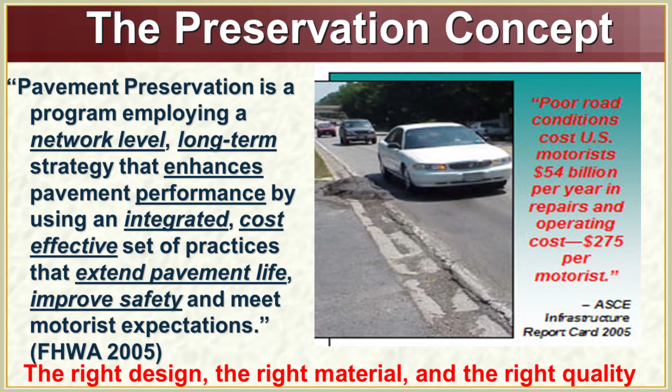Anyway, I've been asked to talk a little bit about extending pavement life, extending the life of pavement preservation techniques. The slide here is just your classic definition of pavement preservation. All the topics you see, the definition, we're going to touch on all of those briefly in the talk. Pretty straightforward—we want to extend the life of the pavement, the life of the technique.

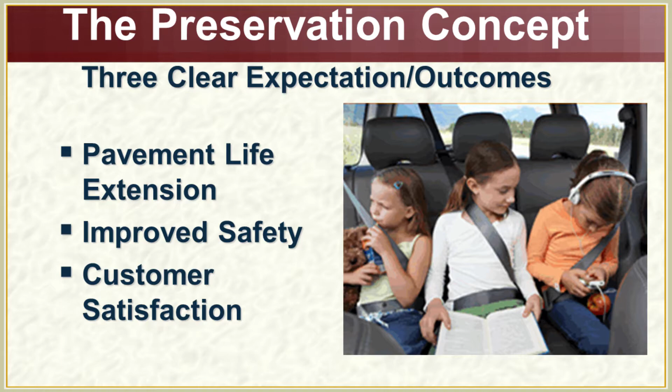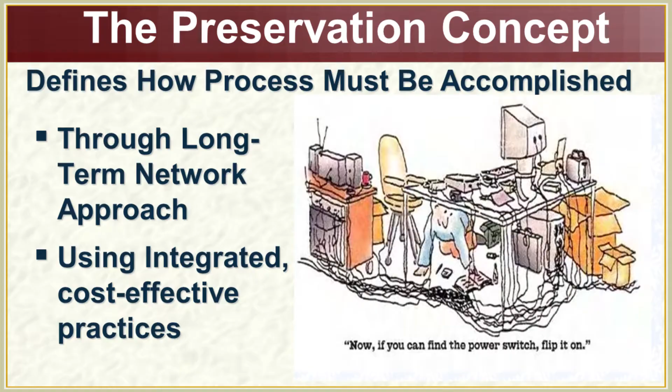Safety is always paramount, and we want to make sure the customers are happy. How the process is accomplished, both through the long-term network approach, using integrated cost-effective practices. The bottom line here is we need data-driven decisions. Pavement life extension—here's a nice picture of a next-gen concrete pavement surface.

So the question that Larry had is, are we extending the treatment life or are we extending the pavement life? And how does one tie in with the other? Are the treatments cost effective?

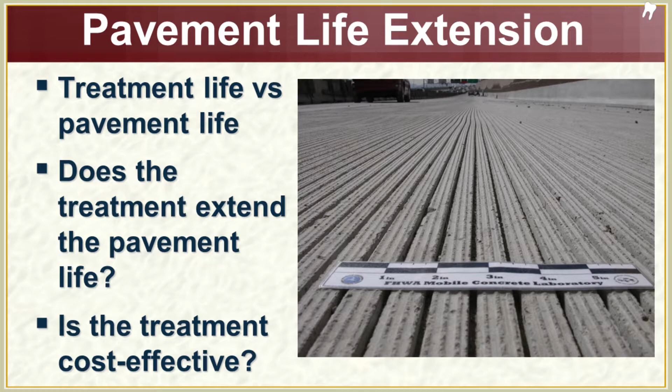Now, I had the notes from Larry's presentation, and I'm not sure if he's got family in the dental business, because about 8 or 9 slides he talked about dental work. So if you see that little tooth in the lower part of the upper right-hand side there, I'm supposed to mention that doing CPR repair is like dental work. We want to make sure we hit it at the right time. We don't want to have a cavity and wait. We're not going to take care of the cavity—we're going to wait for the tooth to get completely pulled down, and then we'll go ahead and get an implant or something along those lines.

If we've got a thing that's wrong, we hit it at the time and not wait 10 years until everything else needs to get addressed. You maintain a concrete pavement in good repair, it should stay good for the entire life of the pavement. One of the things we sometimes deal with is a little bit of roughness early on in the pavement.

The question is, should we be grinding our pavement at year 10, year 15? I think some of the techniques our paving contractors have done in more recent years with real-time smoothness, we are starting to see some very good IRI numbers in the 40s and 50s without any diamond grinding taking place. A lot of our pavements, higher volume roads, take a beating. The low volume roads, when we use concrete pavement, those pavements seem to last a very long time.

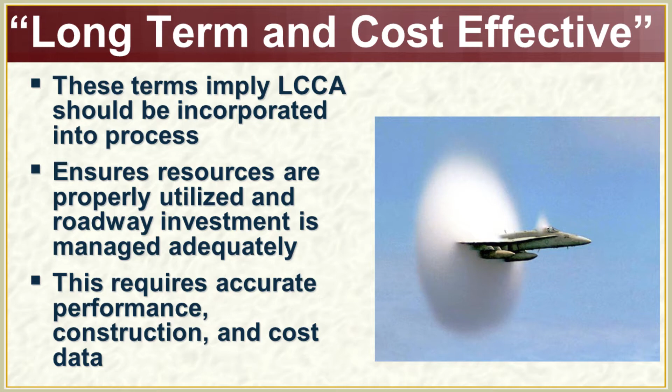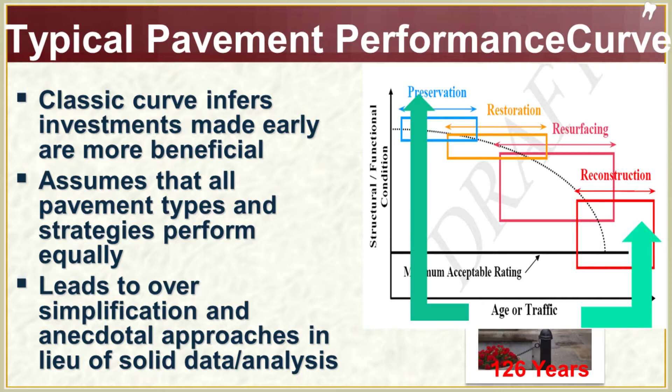We're going here for more data, feeding the pavement preservation, the rehab data, all of that into the LCCA process. It's an interesting curve we've seen, the classic pavement deterioration, pavement preservation curve, where you're starting out in the early life of the pavement with preservation, then you go to restoration. But when you take a look at a pavement such as the one pictured, in Bellefontaine, Ohio, built 126 years ago, there was some rehabilitation work, but that pavement really doesn't match up real well with that curve.

We're going into here—Alicia on Tuesday talked about the circle, having everything kind of going, feeding back into taking your data, putting pavement down, collecting the data, fixing it, and going through that entire process and repeating it. And that's what we've got here: our circle of life.

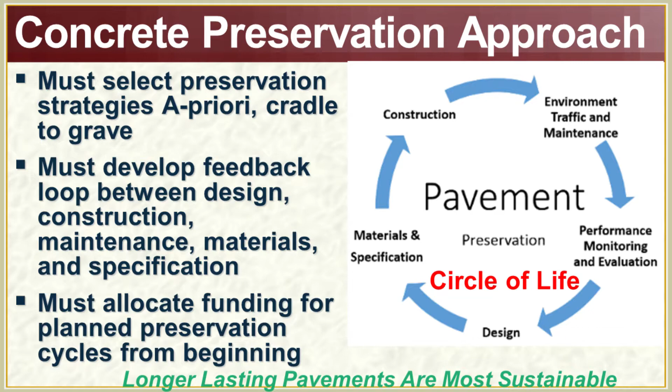You know, we think of concrete pavement as being typically used for heavy loads. We see them on the interstate. When we do use the concrete pavement on a low volume road, we get some pretty darn good life out of it. Not to say that it doesn't work pretty well with the high volume type roads as well.

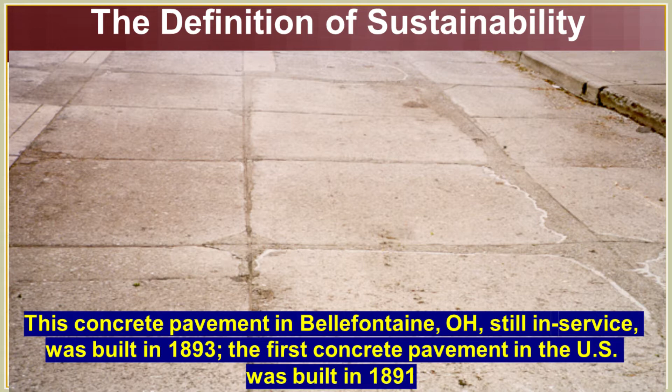A nice little picture on the definition of sustainability. Here we got a pavement. This is the one that I mentioned, Bellefontaine, Ohio. First concrete pavement in the U.S., built in 1891. It's still in service, 126 years after it was built. Another shot of just reinforcing the idea of the dental work, fixing the pavement when it needs to be fixed.

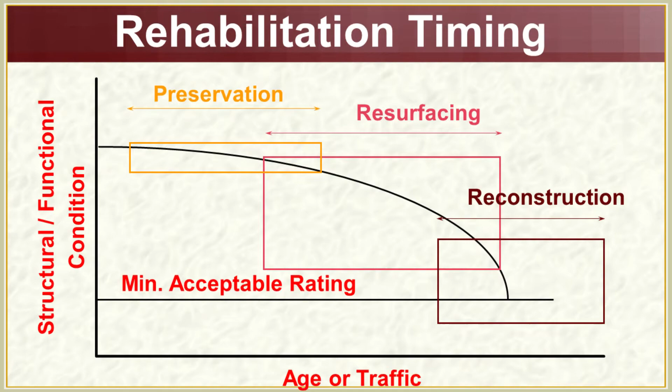This is the classic deterioration curve. This is really pretty much developed more for the asphalt pavement side, and 95–96% of our pavements are asphalt pavements. So in that aspect, maybe this curve works real well. But when we want to compare that with what we see with the concrete pavement, it's maybe a little bit different.

It gets back to the dental work. So when we see the deterioration take place, we don't want to wait until year 10. We may need to do some dental work a little bit beforehand to do the rehab work. And that's where we're getting into that additional life that we're buying by doing that repair.

A little bit of just comment on pavement rehabilitation. Years back, I think the comments were made that we've got a zero maintenance pavement, and I think that caused a lot of problems. I think people had the perception, and it's not only a perception, that we put a concrete pavement down and we didn't touch it. And in reality, in a lot of cases, we really didn't.

It's only been, I think, in the past 10, 15 years that we've really seen states jumping on, and I know particularly here in Pennsylvania, it was only about 12 years ago that we really got serious with the whole host of different types of CPR techniques.

One of the things that's good to know is a lot of states have also had some very tight funding, and we attack things from the worst first type scenario. And I know the work that the department's been doing, Mike Long's group is taking a look at, let's not necessarily attack the worst first, but let's attack the ones where we can get the most cost-effective improvement to our network.

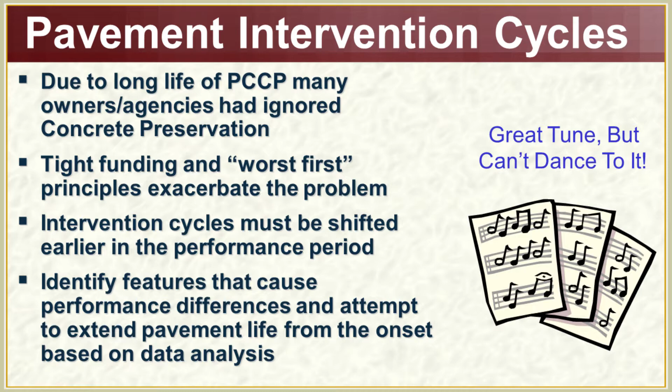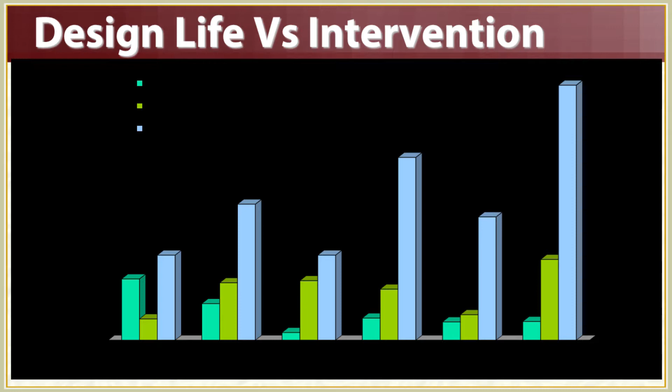Interesting slide over here compares the number of ESALs a pavement was designed for. That's the teal. Green is the amount of traffic that pavement carried before intervention, the diamond grinding, took place, and the blue is how many ESAL loads have taken place. And with all except for one case, the diamond grinding, the rehab work, did not take place until after the designed ESALs were carried on that pavement.

Just touch a little bit on safety. Yesterday was Work Zone Safety Awareness Day. Interesting, sad statistic, and this is from NHTSA. On average, 14 motorists and 2 highway workers are killed in work zones in the United States every week. Now, we've done a lot of work to try to raise the awareness of the dangerous work zone, and we particularly have been focusing on our employees, our fellow workers, inspectors.

But when you look at the statistic, if you're a motorist, you're 7 times more likely to get killed in a work zone than a worker. And in either case, those numbers are both really unacceptable. We've done, I think, a great job at raising the awareness of work zone safety from our perspective, but I think we need to carry the message to our friends, family, and neighbors as well, because there are a lot of things out in work zones that folks are just not aware of.

One of the good things, and I'm happy to say, is that in Pennsylvania we joined Maryland, our neighbor to the south, just this past year. The legislature did approve allowing the department and the turnpike to put cameras in work zones. The hope being not to generate additional revenue, but to slow the traffic down so that everyone gets home that night.

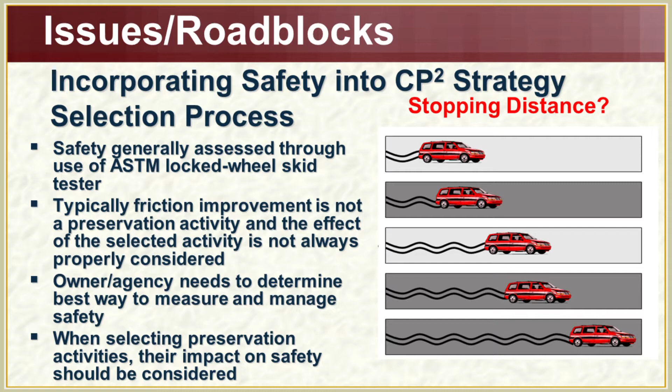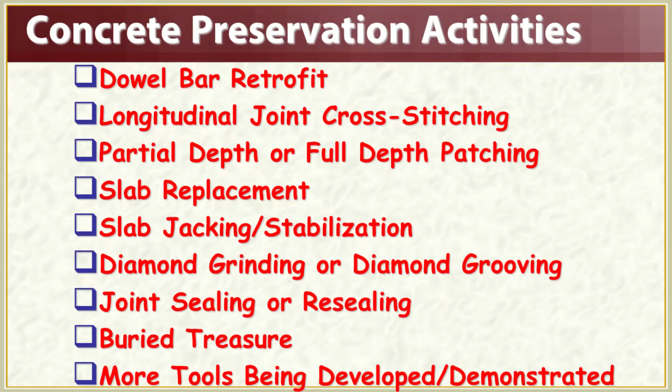Touching just real quick, I don't want to belabor this slide. We certainly do need to take into account safety improvements. I don't know if it necessarily always gets done in all the CPR type projects, but it is something that I think each owner agency needs to take into account when doing pavement preservation work. I want to touch just on a few of the CPR activities. These are pretty much listed in order.

I think it's pretty much in line with a lot of state highway agencies' practices in terms of if you're going to do concrete pavement restoration, what's the order you need to do them? And there's a whole host of techniques that you've got there. I've got a slide on each of these techniques.

Also want to just mention that there's also some tools that are in the development process. PennDOT has done a yeoman's effort to put some additional tools into the Pub 408, into the RC standards, tools that have been used in other northern tier states. I've always looked at CPR as being something where the less intrusive you are, the better for the patient.

20, 30 years ago when something ailed a patient, the surgeon was out there ready to cut things out. And there's a whole host of less intrusive MRIs and other technologies that allow the medical profession to pinpoint what needs to get fixed. Well, it's the same. Let's treat the concrete pavement as a patient as well. And we focus on just addressing the things that need to be fixed and be as least intrusive as possible.

Dowel bar retrofit is taking a concrete joint that hadn't been doweled, or a crack, and putting dowels into the joint. Cross-stitching is for longitudinal cracks. We do not use cross-stitching for transverse cracks, not if we want that technique to work. The dowel bar retrofit is the device we want to use for the transverse cracks because our pavements expand and contract with temperature changes. The longitudinal joints are more like hinge joints. We don't want them opening up.

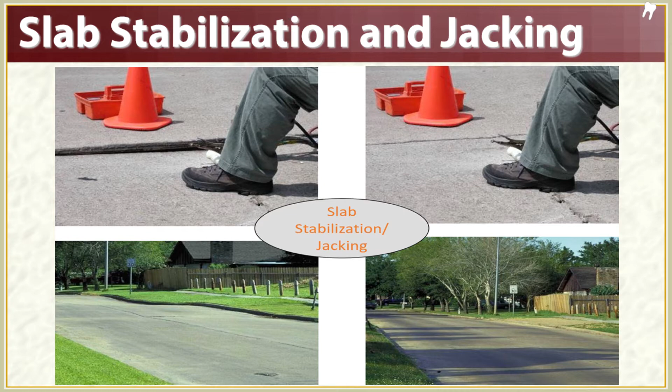And the tie bars, we alternate about every 3 foot, drilling holes at a 40-degree angle, drive number 4 bars in there, epoxy them in, and that holds cracks nice and tight. I don't know what the IRI on that roadway on the bottom left was, but I can guarantee you it was a whole heck of a lot better after they got done doing the slab stabilization and jacking.

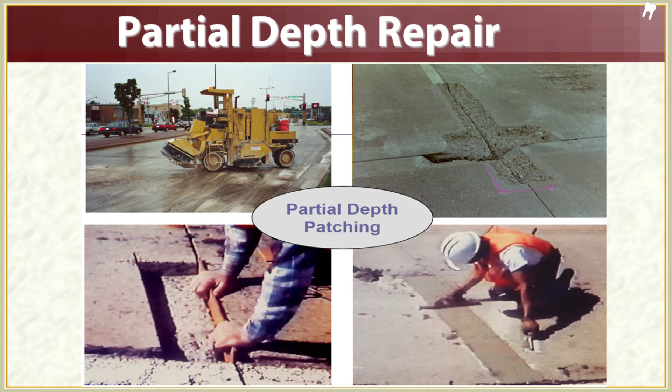Partial depth repair. It's a technique that in some states, some districts, has worked very well. In other districts and other agencies it has not. I think the day before the comment was made on average performance, and the average performance of a spall repair is about 8 to 10 years. Well, it's 8 to 10 years, but if you're the state that's getting 2 or 3 years performance, that average really doesn't mean anything for you.

And if you are a state that's getting 2 or 3 years of performance on the partial depth repair, that means we need to step back and ask what it is we are doing differently from what the others are doing, to make sure that when we do this type of technique, we get the 8 to 10 year performance out of this repair.

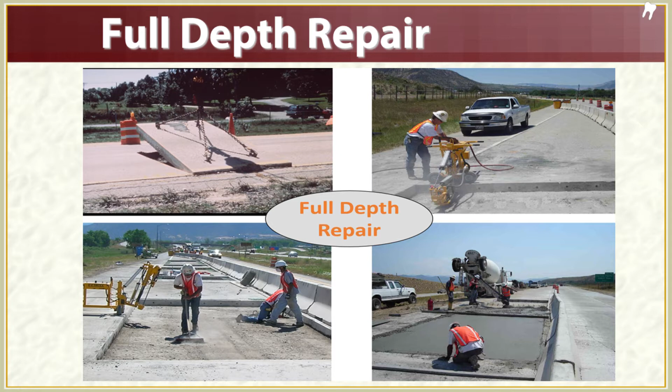Full depth repair, we sometimes do need to take a slab out, or a series of slabs out, and this is a bit more intrusive than the partial depth repair. We're taking the entire slab out. Depending on what kind of base we've got, we sometimes have to do a lot of base repair underneath. Sometimes the quality of the base is the reason we had the cracking and distress in the pavement to begin with. We take out the deteriorated concrete. Sometimes, like I said, the base comes out with it.

We repair the base. We've got to drill holes into the concrete that's going to remain in place, and typically that's a 12-foot wide panel. We typically put 11, some states still do 12 dowels per joint. We drill holes, put epoxy in there. We've got to clean that hole out, and when we put those dowel bars in, it's one of the things where I'm seeing not as good performance on our full depth patches on a handful of projects.

We need to make sure that we get that epoxy grout to encapsulate the entire dowel. Otherwise, all this effort to chip out the concrete, lift it out, do the base repair, if we don't make sure those dowels are properly installed, we've just thrown away some significant dollars, and 2 or 3 years later we're back to where we don't have an acceptable riding pavement.

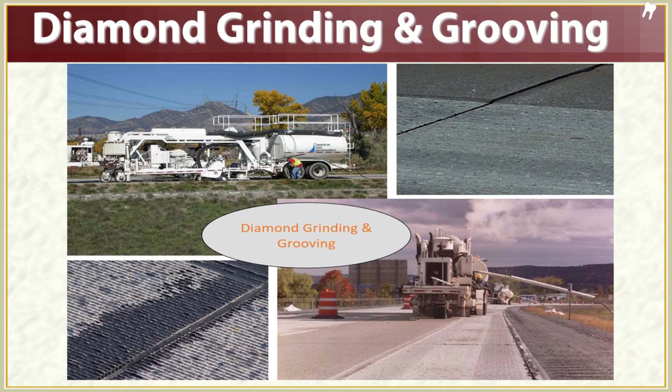Diamond grinding and grooving, a lot of that is done for the purpose of getting a better IRI. There's a lot of rehab techniques. A smoother rehab pavement is also going to last longer than a rougher one.

So if we do a full depth patch, we generally want to go ahead and make sure that we do the diamond grinding. Some of the other techniques, depending on what the condition of the pavement is, we want to make sure that we get a good riding surface at the time when we walk away from that CPR type project. Joint and crack sealing is another technique.

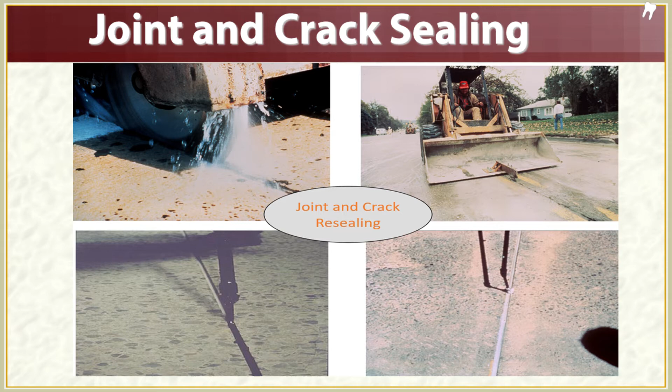Interestingly, there are a number of states that have gone to eliminating joint sealing. There's an industry group called the Seal No Seal Group. There's a handful of states. I don't think Wisconsin sealed a concrete pavement joint on an interstate type pavement in about 30 years. There's a few other states that are doing that.

What we do here in Pennsylvania is we do seal our joints, we do seal our cracks. One of the things that we've seen is that our type 2 sealants have not given us the kind of performance that we need, and so we recently went to the type 4 sealant, which is really more suitable for the environment that we have up here in the northern tier.

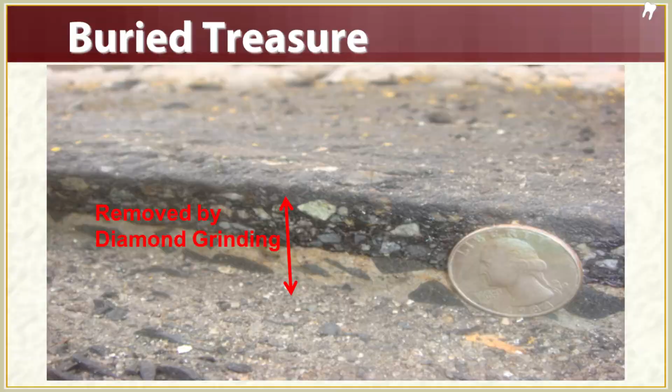Last thing is buried treasure, and I know it's been done in New Jersey and a handful of other states. It's essentially taking a concrete pavement that was overlaid for one reason or another. The asphalt is taken off, and what we've got underneath, in some cases, is a pretty darn good looking concrete pavement. And the buried treasure concept is essentially taking that pavement, doing some minor CPR work, diamond grinding it, and opening that pavement up to traffic. And like I said, New Jersey was one state that tried that.

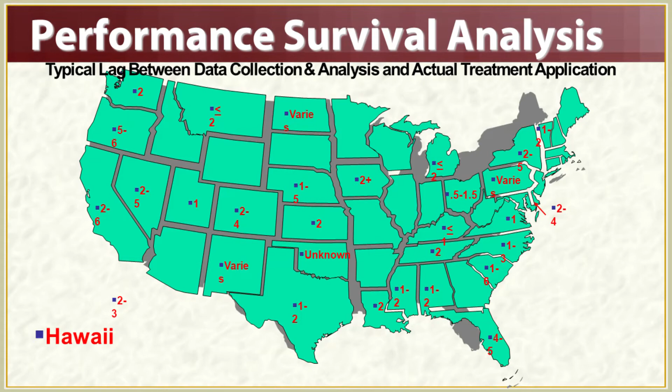One of the things that we also want to take a look at when we do data collection for CPR techniques is when we collect the data and when we go out and do the rehab work. I know the policy in Pennsylvania is that when we scope out a project, that project is going to be field visited within 6 months of the CPR project being put out on the street. And so that kind of helps to minimize the deterioration that takes place.

It really doesn't do us any good to go out, collect data, scope a project, and then not go out there for another 2 or 3 years, because that pavement in that 2 or 3 year period is taking on more loads, more freeze-thaw cycles, and is getting beat down beforehand.

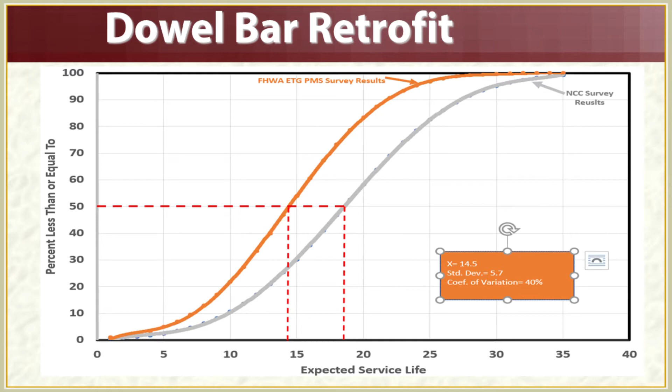Dowel bar retrofit, I just want to show a curve. This was developed by the FHWA expert technical group a few years ago. The brown curve, I guess, is the FHWA ETG group, and the gray one is the NCC. And it's essentially just showing that expected life that you're going to get, and we picked the 50%. If you're doing a dowel bar retrofit, the FHWA survey suggested that you're going to probably get about 14 years life out of that repair. The Tech Center had a little bit more on that.

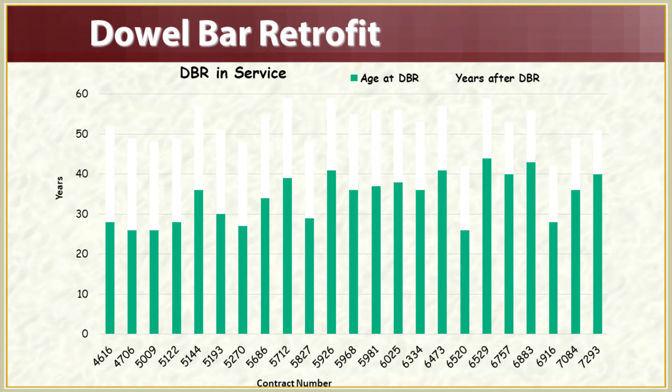I think this is an interesting graph. This is data that was collected on doing DBR. What I think is remarkable here is if you look at the projects where they got almost 30 years life out of this pavement. Now this was a jointed plain pavement. I believe it's jointed plain, undoweled, Interstate 90. Undoweled pavement served for 28, 30, 35 years.

They performed DBR, and after the DBR was performed, on some of those sections of pavement, we're getting 50, 60 years life out of that, which I think is a pretty darn good performance for a pavement that, in my opinion, if you don't dowel a pavement for a high type, interstate type pavement, that's not something I would suggest.

Just changing gears real quick. We had some nice presentations, and I always like to just put a little plug in on workforce development. We already are seeing a changing of the guard. And I look around here in the audience in this room, and I'm going to say probably about 80% of us that are here have got more of our career behind us than what we've got left in front of us, which means we've got a newer generation coming in.

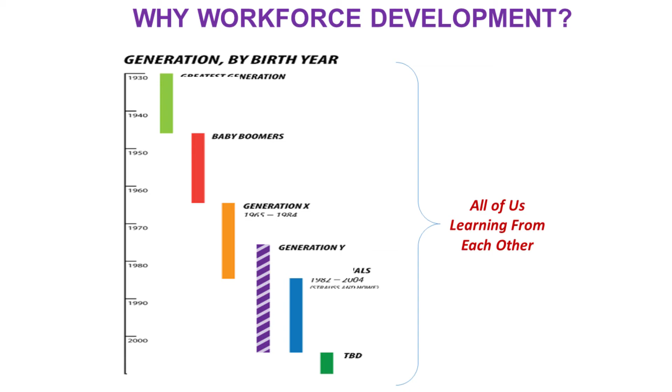And with this newer generation, us folks that have been in the industry, been in the business for 20, 30 years, we've accrued a lot of experience, knowledge, institutional knowledge, technical knowledge, and it's really incumbent on us to try to share as much of that with the folks that are going to be coming in very closely behind us and taking whatever part of the industry organization we're in and carrying the ball moving forward. We all think a little differently.

The baby boomers, we approach things a little differently. We're still amazed by the iPhones. The folks that are in the millennials, they can't imagine having lived in a period where we only had 3 television stations and it was black and white TV and you had to get your butt off the couch and turn the channel. So there are different ways of thinking. You know, the older, the more seasoned folks, we've looked at it from opening up books and going through what we call the traditional way of learning.

YouTube, there's videos, there's a whole host of other ways that information can be shared. The whole concept of workforce development, in my opinion, can't be overstated. I was real thrilled hearing about FHWA's presentation on the 6 different techniques that are coming out, which are going to be available online here very shortly on CPR techniques.

There's a whole host of webinars through ACPA, through the Tech Center, through FHWA. Just-in-time training, I think, is something that allows the more experienced folks to share their knowledge and experience on a project and apply that to get a better performing project.

Workshops, field demos - one of the things that Larry and I were talking about, he was real excited about the pavement preservation rodeo that was conducted in Nashville a couple of years ago, where they took half a day and demonstrated a whole host of different techniques. It gave everyone the opportunity to get their feel, touch, feel, smell, the visual part, which I think is an important part of education.